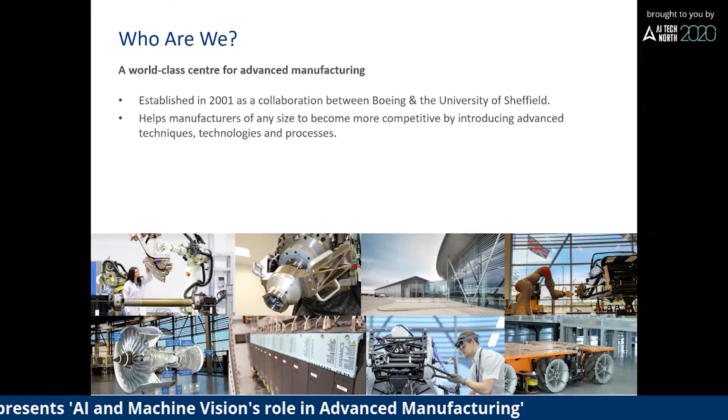Research Centre. We were established in 2001 as a collaboration between Boeing and the University of Sheffield, and that link between industry and academia is something that we keep to this very day. I'll go over a little bit what that really means to us and how that impacts the work that we do.

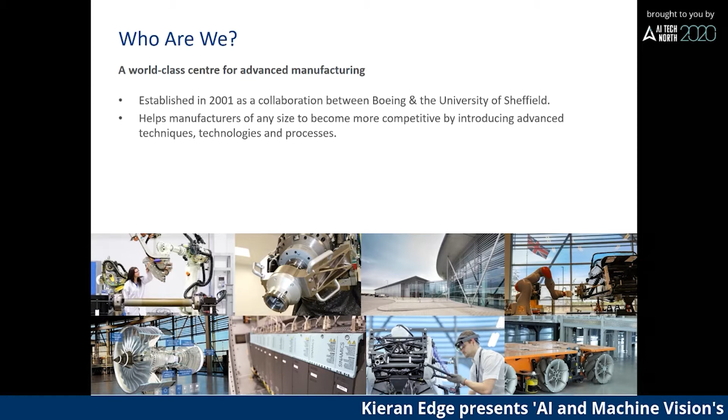Our mission statement is to help manufacturers of any kind and any size within the UK to become more competitive and more profitable by introducing advanced techniques, technologies and processes. So we de-risk it, make sure that it works, and then put it off into industry.

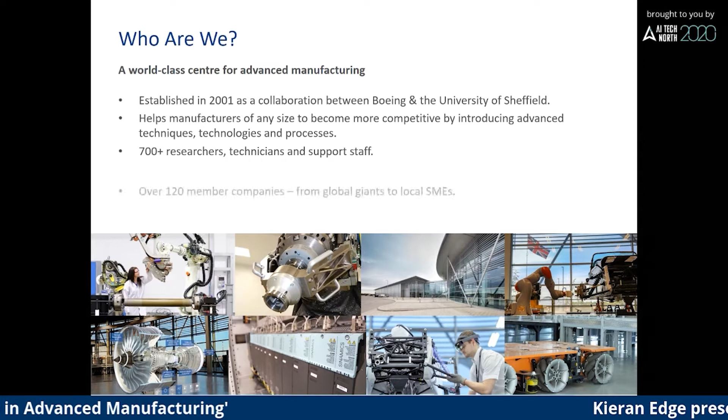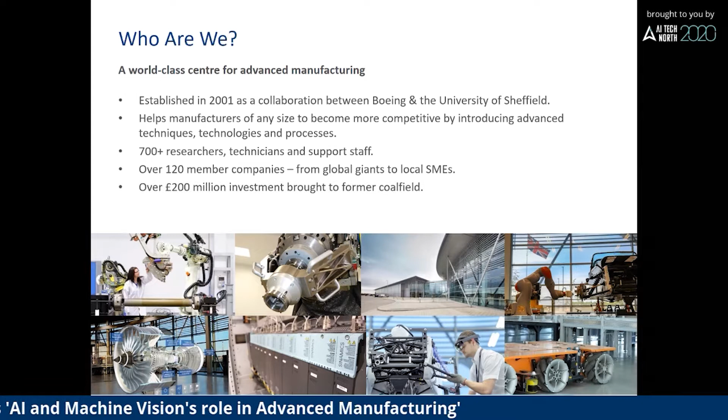We have over 700 researchers, technicians and support staff here, so we have a large capacity for doing a large range of projects, and we have over 120 member companies, from global giants to local SMEs. We brought over £200 million of investment to the former coalfield here in Sheffield, to the Orgreave colliery, and we continue to work with Rolls-Royce and Boeing as part of their global research networks.

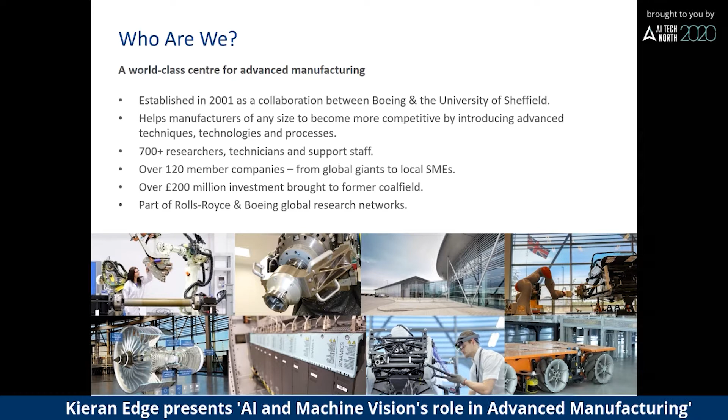So this is sort of the region that we sit in as well. I don't know if you're familiar with the MRL scale, but it's a scale of how mature a technology is, where number one is it's sort of a scientific concept, done in a lab somewhere in a university. And number 9 is it's been in use for ages, we know all the metrics about it, we know what this technology is.

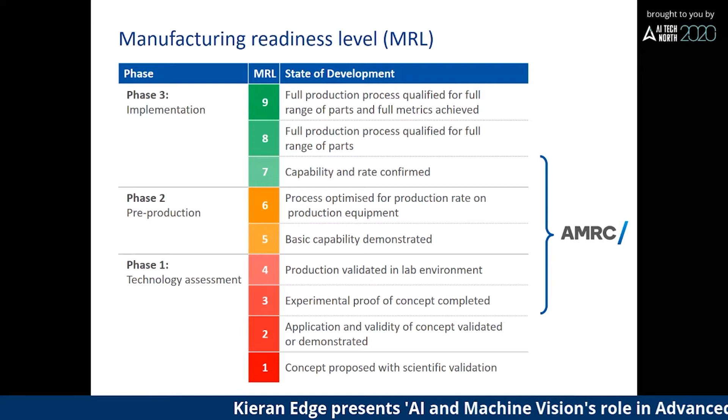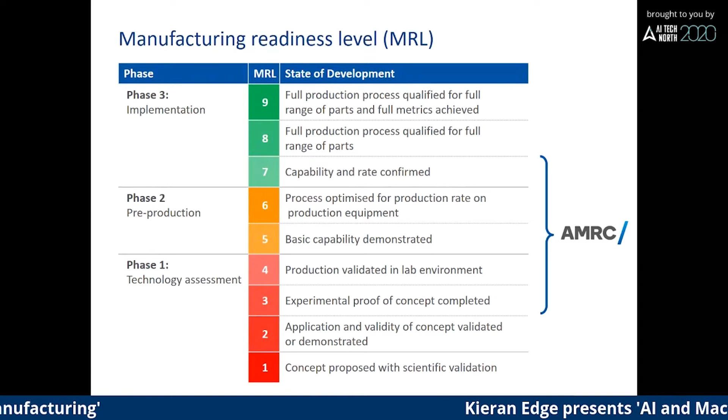And we sit in this gap between 3 and 7. So getting it from production, proof of concept, experimental proof of concept, to the point where it's in pre-production, at which point we hand it over either to an integrator or the actual end user themselves to then run with that technology and work with it. This is the sort of sample process that we undertake, where we take low-level technology from academia, we develop proof of concepts, we make it more mature, and then we hand it over into industry integrators and production.

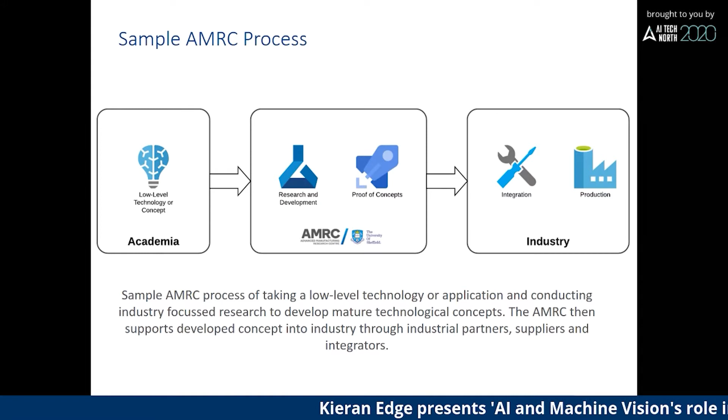Right, so this is the main body of the speech now, after we get the introductory spiel out of the way: the growing need for machine vision in advanced manufacturing.

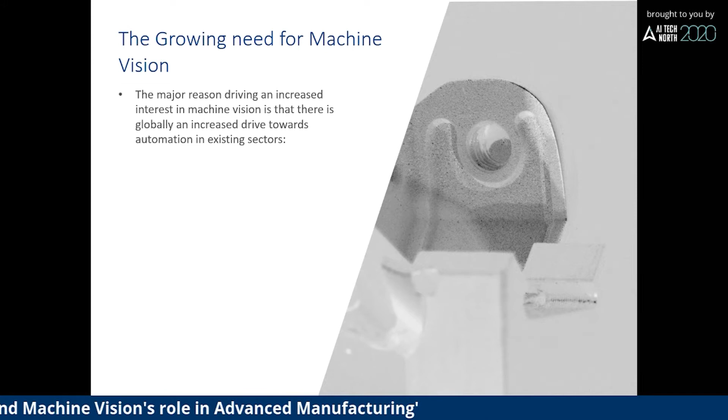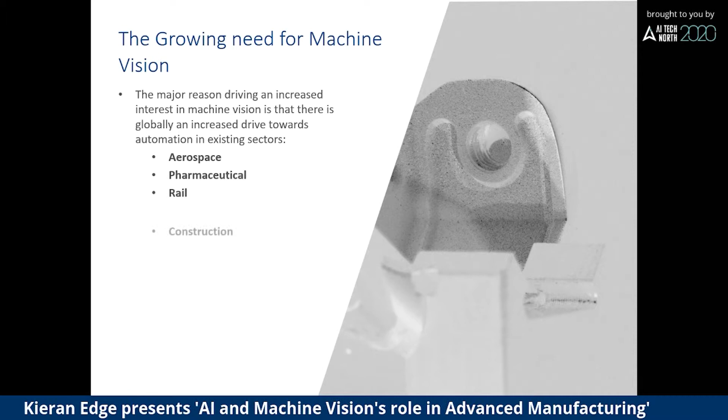We work with all these different companies from all these different industries, but what we see is they seem to have the same needs, same requirements for machine vision and for AI in their industry. The main sectors where we're seeing the largest drives at the moment are aerospace, pharmaceutical, rail and construction. This is where we're seeing the largest increase in interest in this sort of area, machine vision and AI.

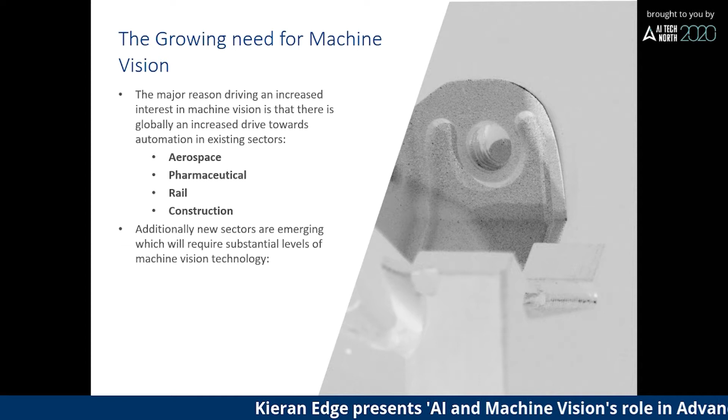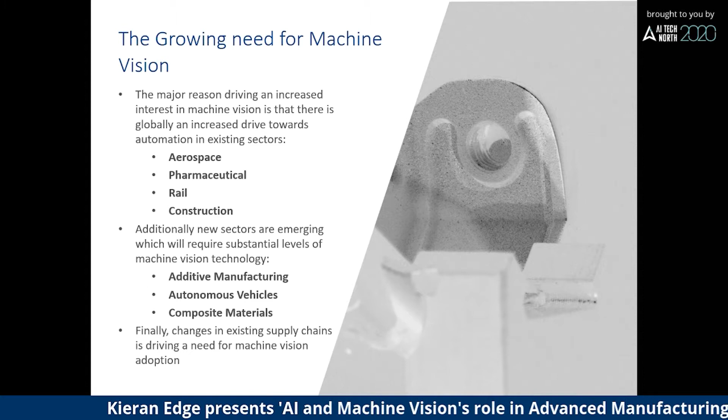Additionally, we're seeing new sectors starting to emerge and become increasingly more interested in this type of work, including additive manufacturing, autonomous vehicles, and composite materials. Finally, the main area where we're seeing growing need for machine vision is in supply chains, and the need to reduce the length of supply chains and increase the overall resilience of supply chains in general.

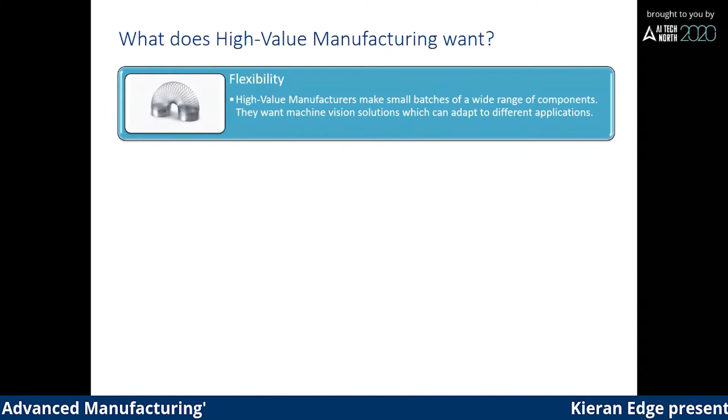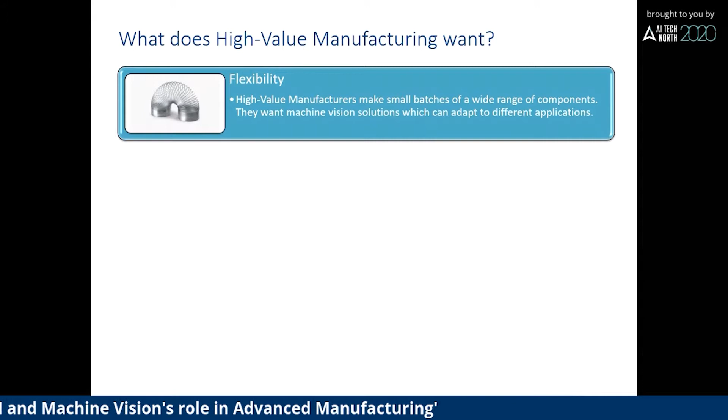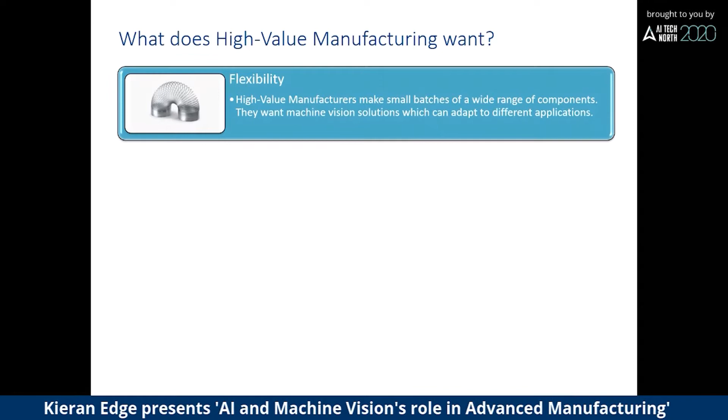So what do these high-value manufacturers want? What do aerospace, pharmaceutical, rail, construction, all these advanced manufacturing firms want from a machine vision system and an AI system? They want flexibility. High-value manufacturers make small batches of a wide range of very valuable components, so they can't have a machine vision system and an AI system tailored for each specific type of component. They need something flexible, something that can do a range of activities, otherwise they don't have enough space to put these technologies into their facilities.

They want systems to be scalable. They want them to be able to scale with their components and with their production.

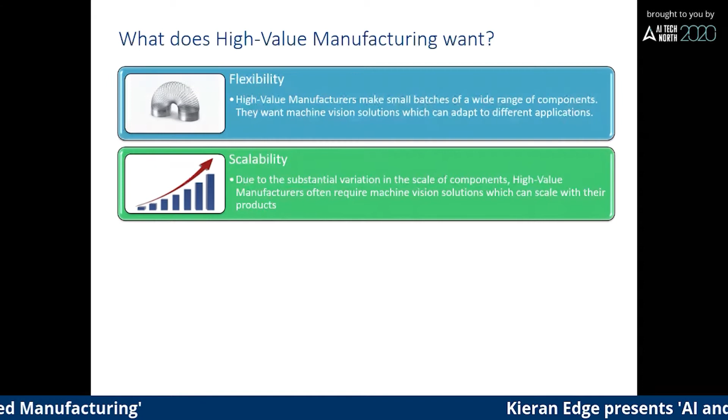They want it to be able to say, I want this that can inspect a turbine blade that's this big, and scale it up so it can also inspect a fan blade, which is 50 times the size of it. They want this technology to be adaptable and scalable.

They want traceability in it. They want to be able to link the decisions that are being made by AI and machine vision systems and be able to actually trace them through the life of the component, so they can say, I know when this decision was made about this component at this time, this is what it's done, and this is what it looks like over its life.

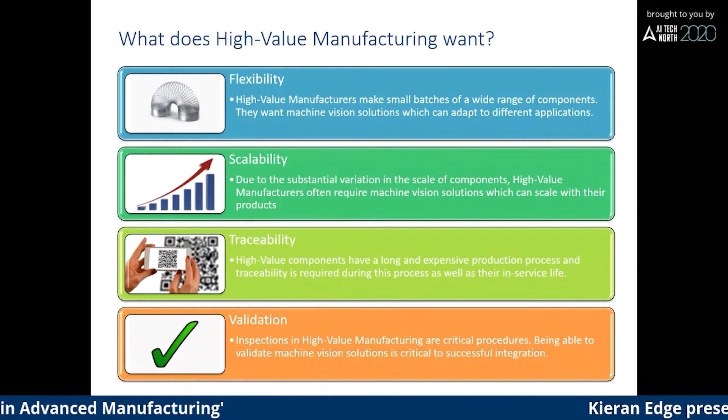Validation. They want to be able to say, this system will work. This system will work because we've proved it out. We tested it to its limits. We know that this will work. An aeroplane won't fall out of the sky because we are absolutely certain that this system will work.

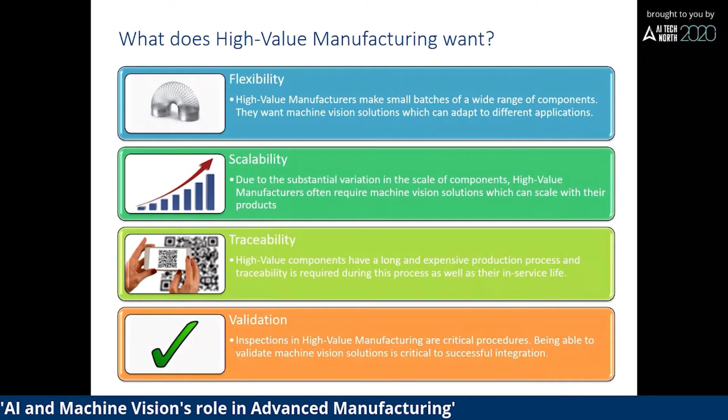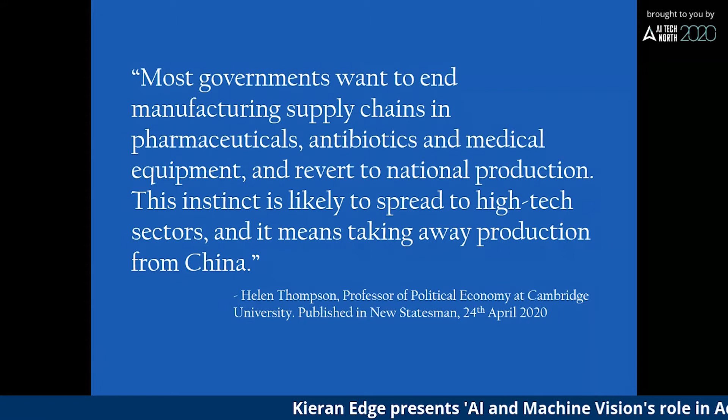Now, moving tack a little bit, we're seeing an increased drive amongst advanced manufacturers to reduce supply chain. This is very poignant at the moment, in that most governments want to end manufacturing supply chains in pharmaceuticals, antibiotics, and medical equipment and revert to national production. This instinct is likely to spread to high-tech sectors, and it means taking away production from China. That's Helen Thompson, Professor of Political Economy at Cambridge University.

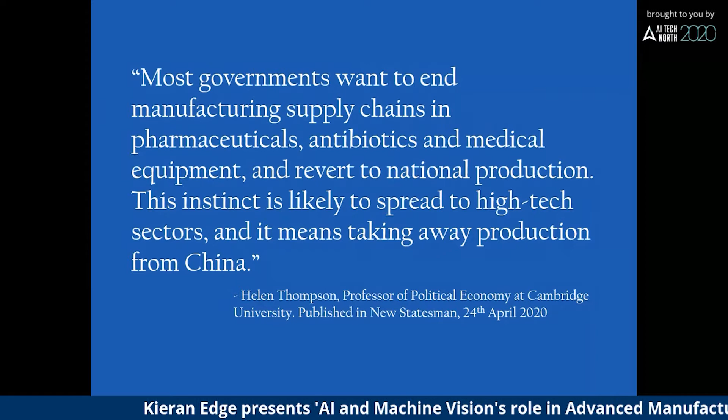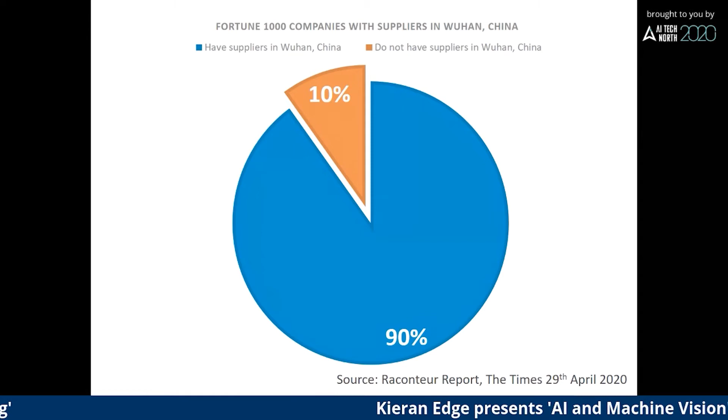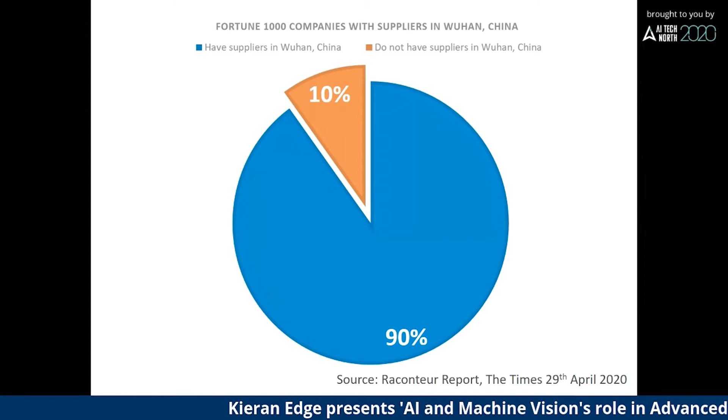And this is very much what we're seeing as well from industry. They want to take supply chains and reduce them. Of the Fortune 1000 companies, 90% had suppliers in their supply chain in Wuhan, China. So when the coronavirus crisis started to hit all the way back in 2019, the supply chains were immediately exposed and left vulnerable. So the impact of coronavirus to UK manufacturing started before coronavirus really started to impact UK society.

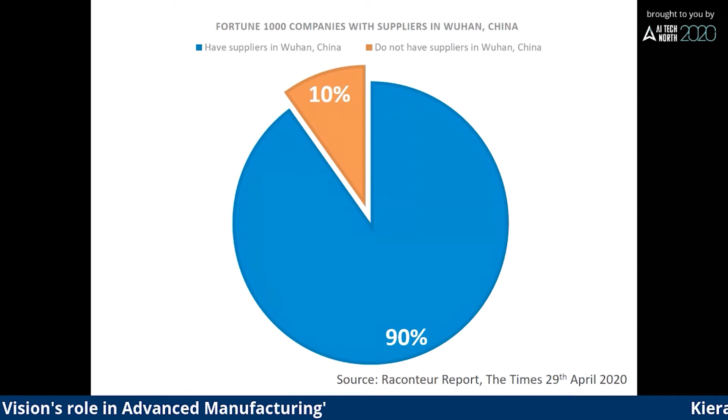Now, because of this, there's this drive to make these supply chains more resilient, make them so that they're not going to suffer such global shocks, so they're not going to take that and really have impacts, because a supply chain, like any chain, is only as strong as its weakest link. So how do we make this better? And that leads us to this.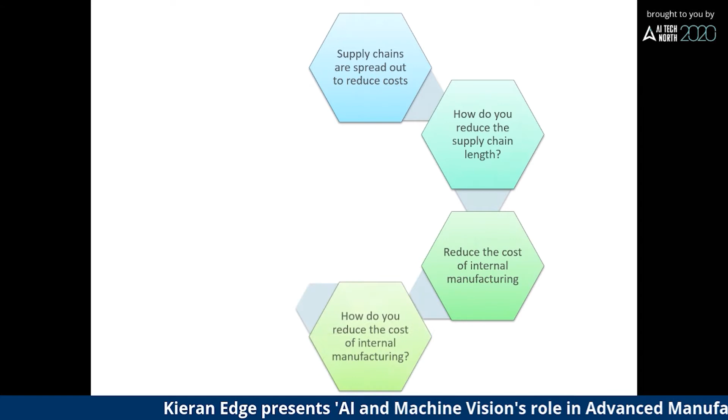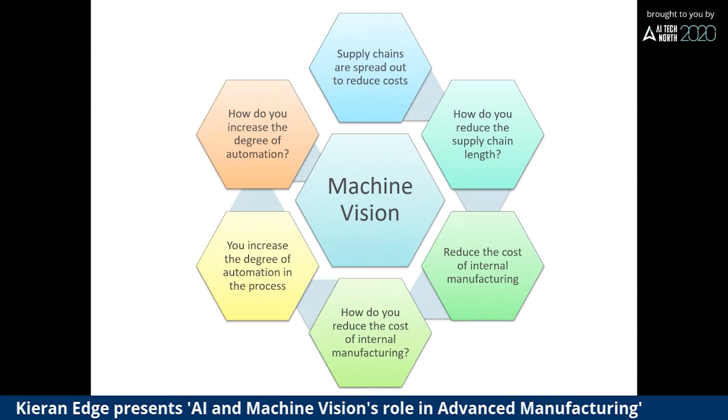How do you reduce the cost of internal manufacturing? Well, you need to increase the amount of automation that you have in the process. How do you do that? Machine vision. So machine vision and artificial intelligence within the machine vision is how you're going to reduce supply chains by increasing automation and making British manufacturing more competitive, more cost effective, more cheap.

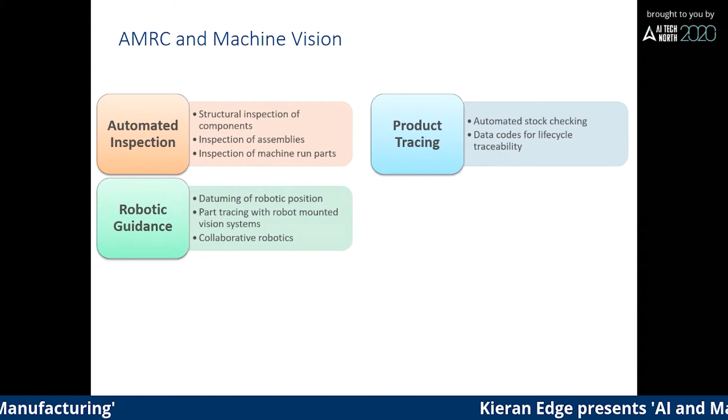Now, how do we operate? We at the AMRC currently conduct areas of research in many areas of machine vision and artificial intelligence. We look at automated inspection, product tracing, robotic guidance, process monitoring, AI for a wide range of activities, and 3D inspection. These are the main areas where we're currently researching machine vision.

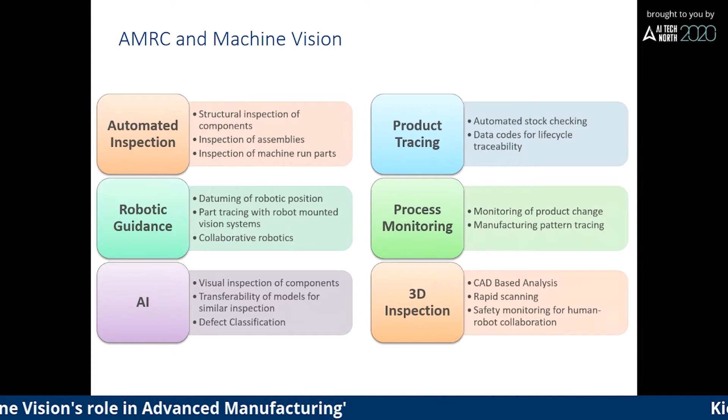So what I want to do now is give you 3 different example applications and different areas of research that we've worked on in a few different sectors. So the first example I'm going to walk you through is talking about a partner-specific application which we've worked on to solve with a large aerospace firm.

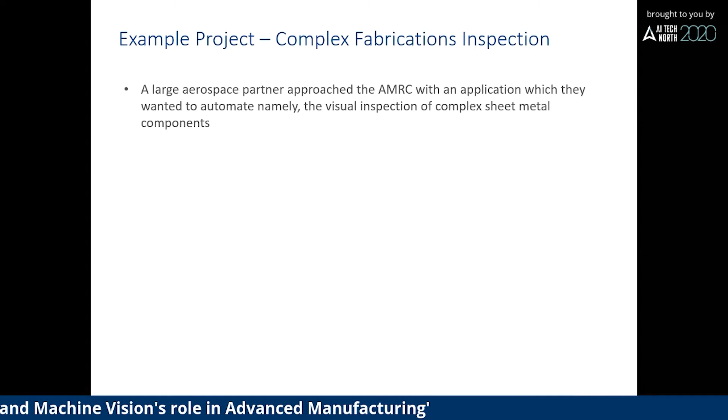Now, a large aerospace partner of the AMRC approached us with an application saying they want to automate the visual inspection of complex sheet metal components. And this application very much highlights what I was showing about what advanced manufacturers actually want from this. There was a wide range of features on these components, and a wide range of components in general that they needed to inspect.

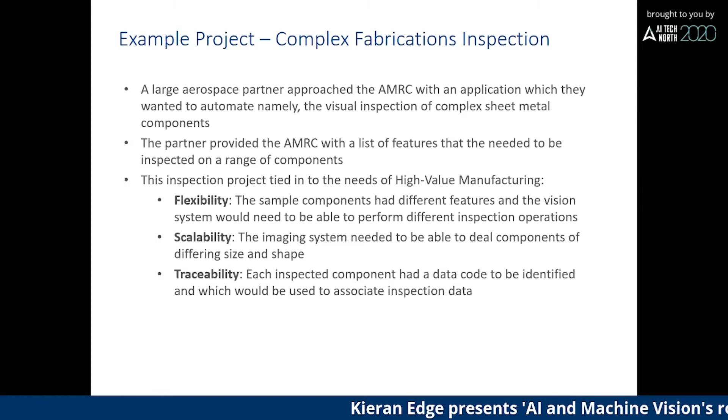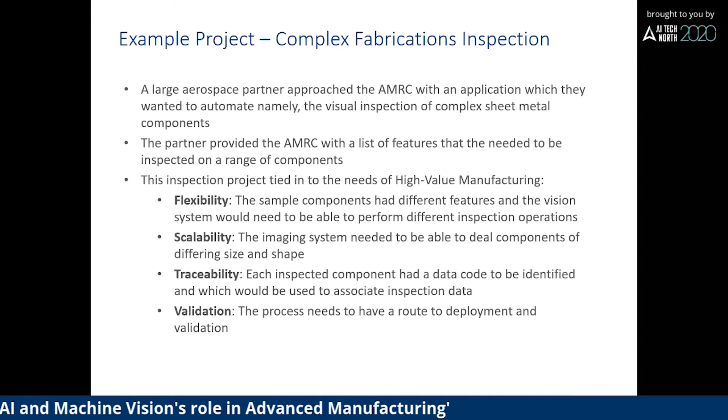So they want to be able to say this system made this decision on this component, and I can trace that right back here, like they do with operators at the moment. They want to validate the process, to show that this new AI system is as good or better than the current human inspection process, which is really key, and surprisingly difficult. It's possibly the hardest part of this entire process.

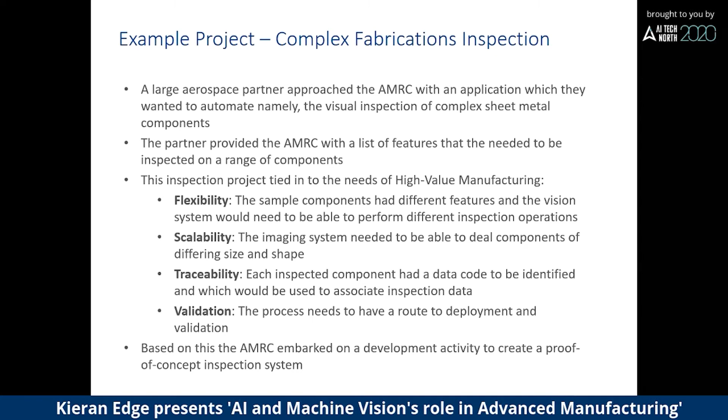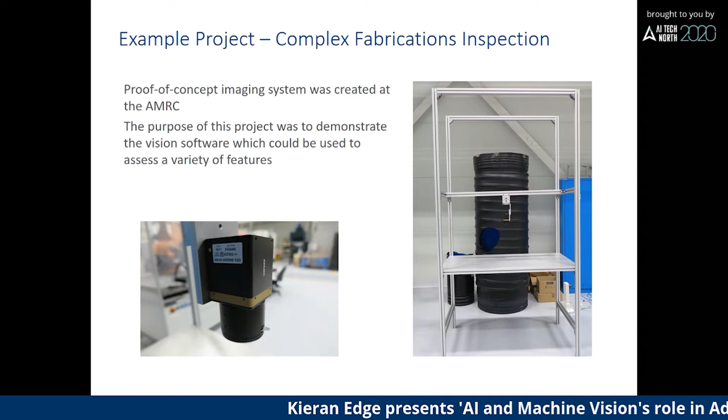So based on the requirements and samples they gave us, the AMRC embarked on a series of development activities to create this proof of concept inspection system. We did it quite rough, quite rugged, considering how advanced the actual components are. We've got the metal frame, set up the camera so we could start acquiring data and making a sample.

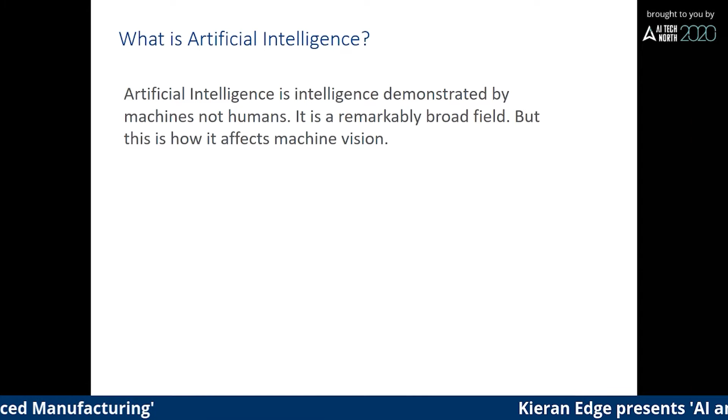Now I think at this point it's important to identify the difference between artificial intelligence and machine vision for these types of activities. There's a couple of approaches in machine vision. The classical approach: the camera takes a picture, we give it data and rules, pass that through a classical machine vision system, and you get results - how many holes, how many edges, the difference, the intensity of light. However, when you're training an AI system to do these activities, you're not giving it data and rules.

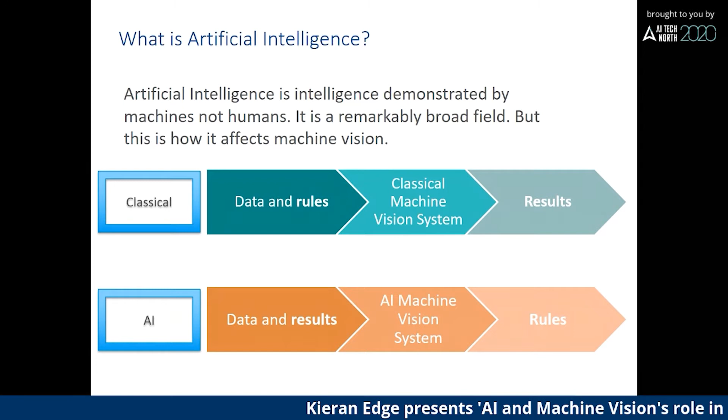You're giving it data and results - saying in this image there is a crack, in this image there is burning, there is melting. And the AI machine vision system then learns the rules and outputs them instead, so you're using that instead of manually processing it. We found you can use both of these methods in tandem to produce a much more competent system than was previously possible, or available just by using them individually.

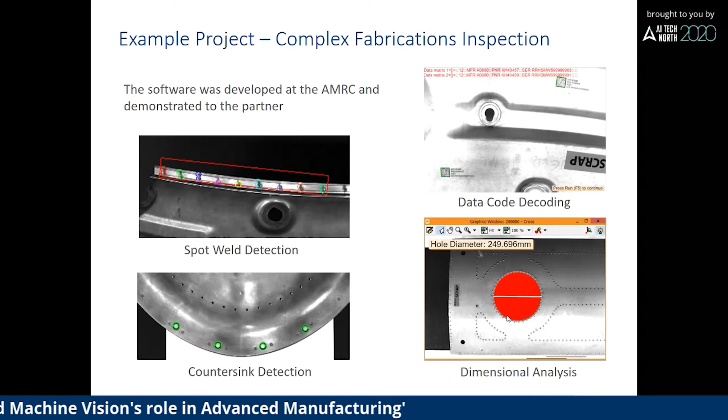So we attacked a lot of different applications here - using AI to identify spot welds on the surface, using AI to identify countersinks and their location, and using classical machine vision to decode data codes and perform dimensional analysis. In this sense, we got AI and classical image processing techniques to interact with each other and complement each other's strengths and weaknesses.

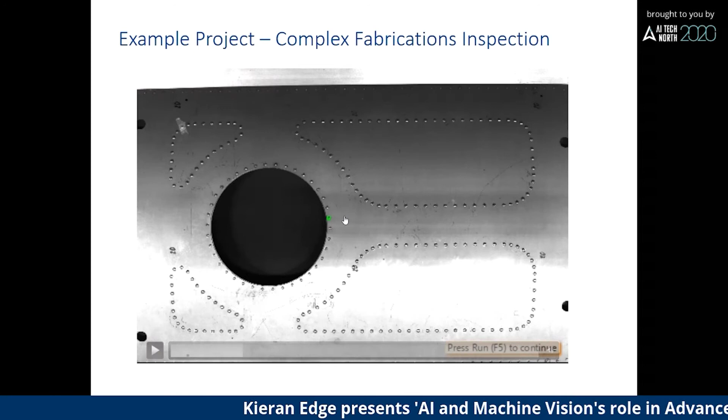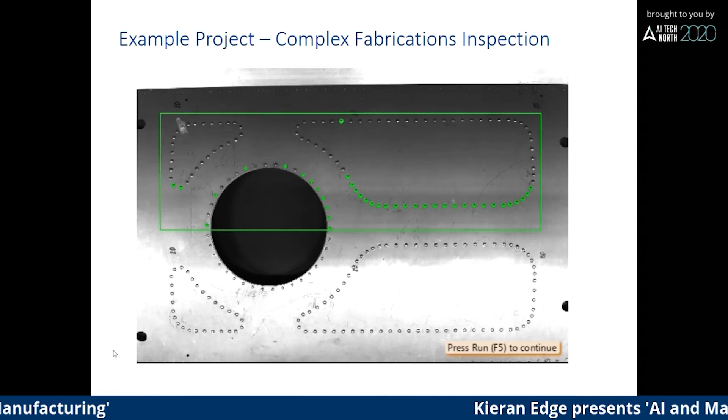This is an example of using the system to identify rivets on a component in real time, counting them and giving their location. We load the component in, say this is the component we're looking at, and we want to identify these rivets all around its surface. It starts on the first one and finds every single rivet in the image, counting them up - 113 rivets identified.

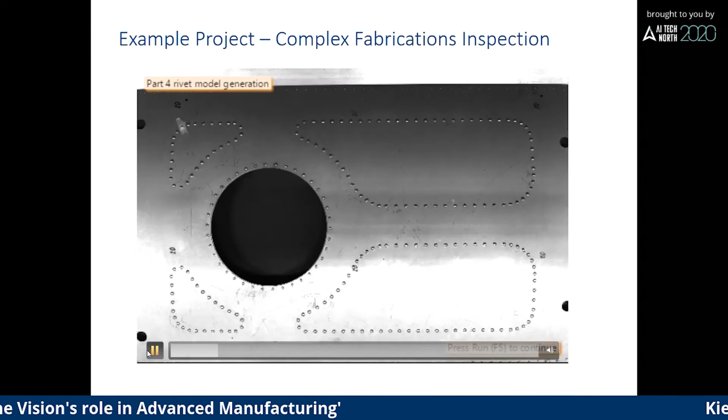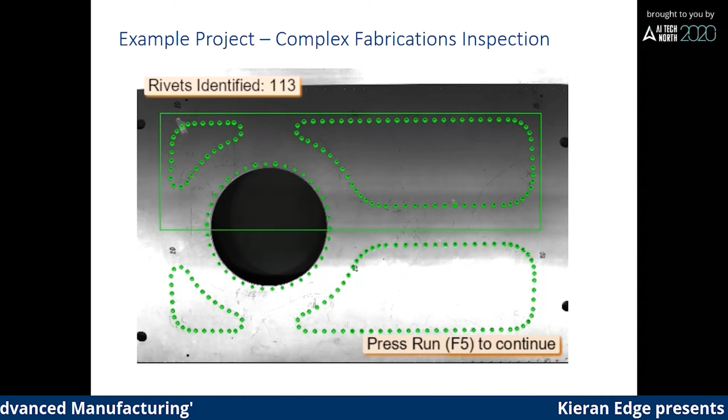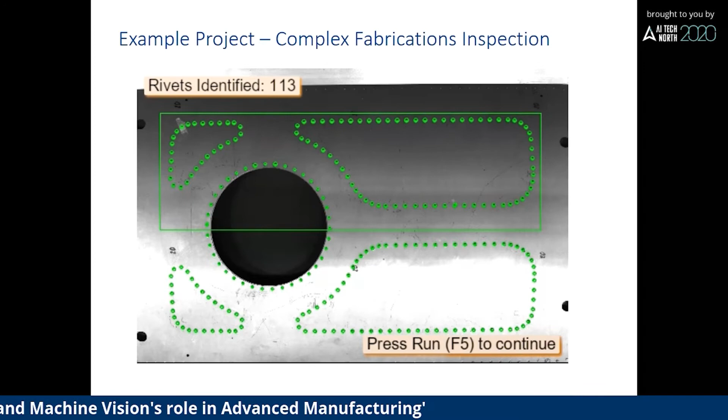Much faster, much more accurate than a human. You can see it actually processing in real time, identifying them as quickly as it can. This is a very fast system for identifying these rivets, and it's scalable and flexible because it knows what rivets are - it doesn't know what this component is, it knows what rivets are and how to find them. In the same way, if you told a human to go find all the rivets in that thing, it doesn't matter what that thing is, it knows what it's looking for. And that's how this system operates.

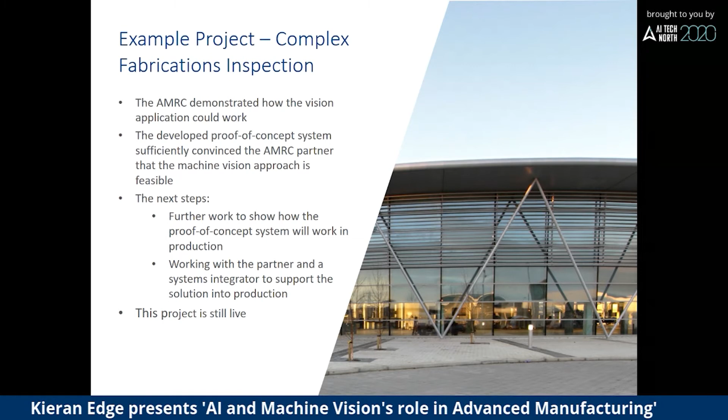So we're still working on this, it's still live, and we're looking at putting this into production now. We're looking to work with partners and systems integrators to support this solution into production. So if anybody wants to get in touch after us to talk about this type of project or activity, please feel free to do so.

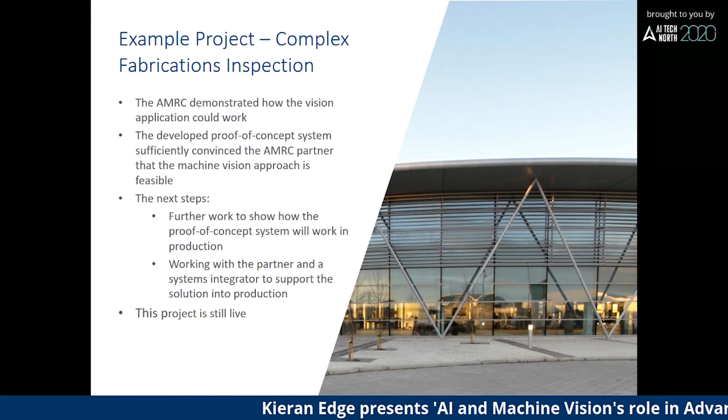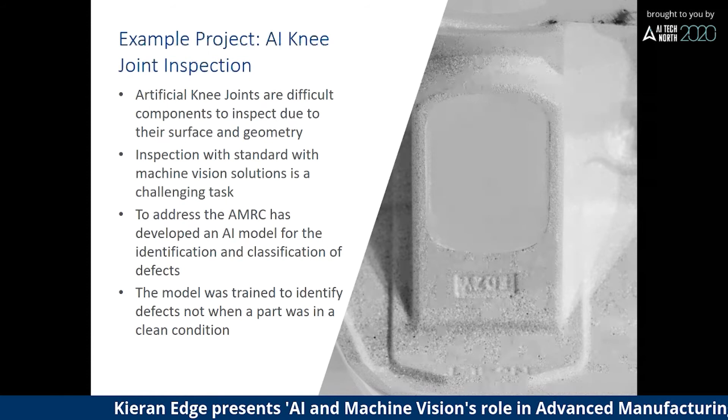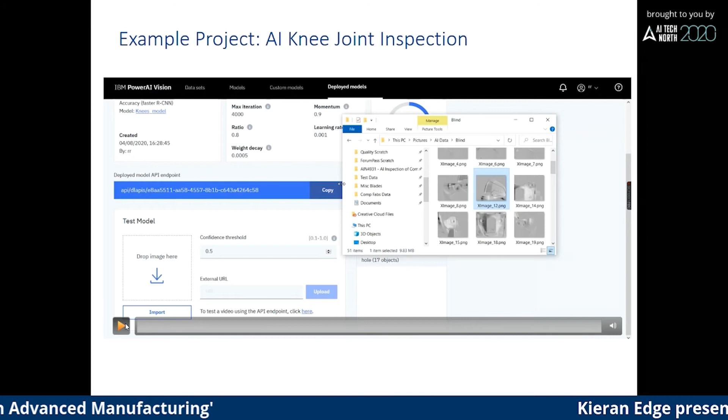We've done a lot of work with IBM to get AI solutions actually on shop floors. This is one example, bringing in the knee image, quickly processing it, identifying a scratch, identifying two holes, and classifying them. This is a model which we have trained, and it's working in real time.

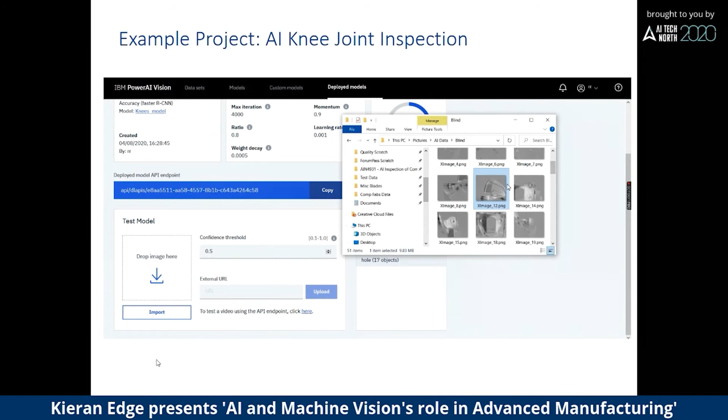We've trained it based on examples of defects, not examples of knee joints. It doesn't know what knee joints are, really. It knows what scratches are, it knows what holes are, and that's what it's looking for. It doesn't matter on the shape or the size of the knee joint. It matters whether it has scratches or holes.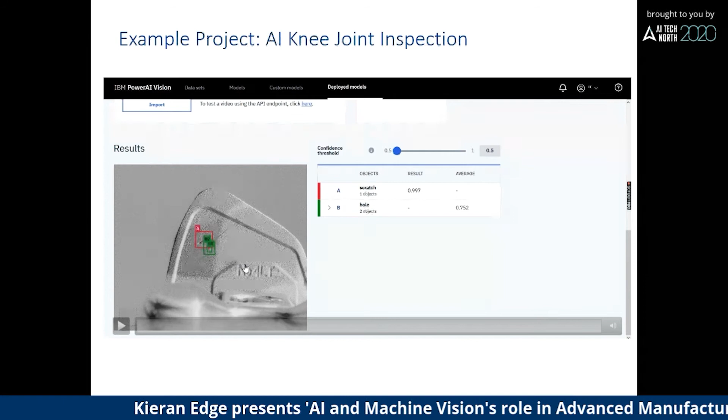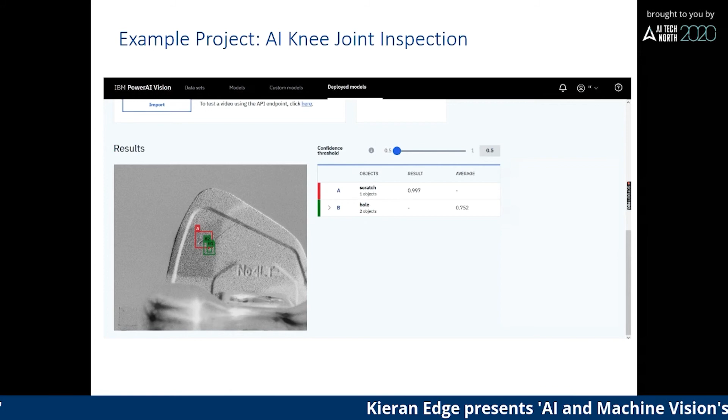So this is something we're currently trying to do, to automate these sensitive inspections in the medical industry, and this is what's needed for this type of inspection. To perform this activity using classical machine vision is far too difficult, almost impossible. We know that, we've tried it. It's too hard to actually do and make adaptable. You need artificial intelligence to do that.

We're also doing low-level research into new technologies. So this is an example of a new type of imaging called polarization imaging, where we're not capturing the intensity of light so much as we're capturing the actual orientation of light.

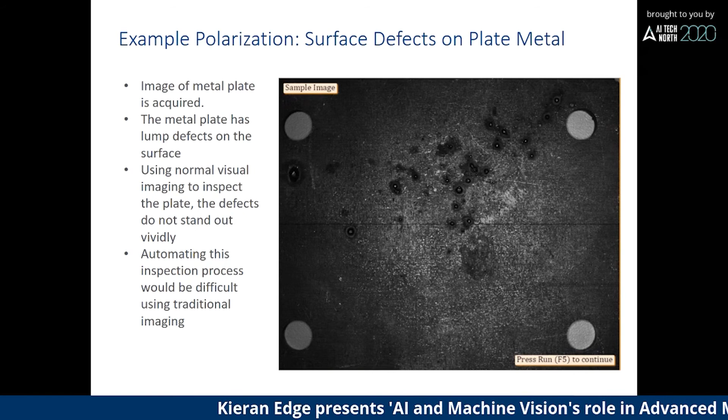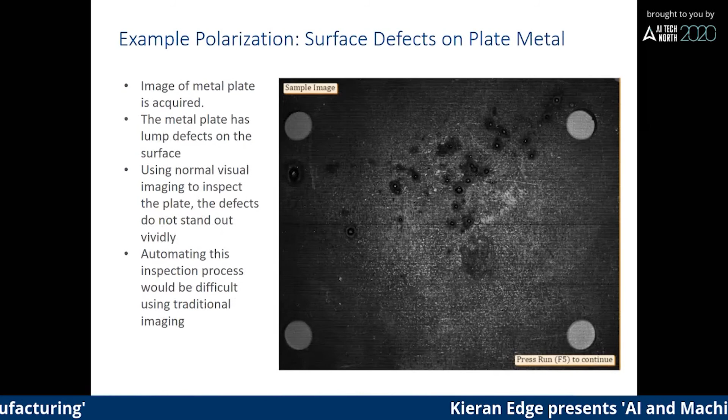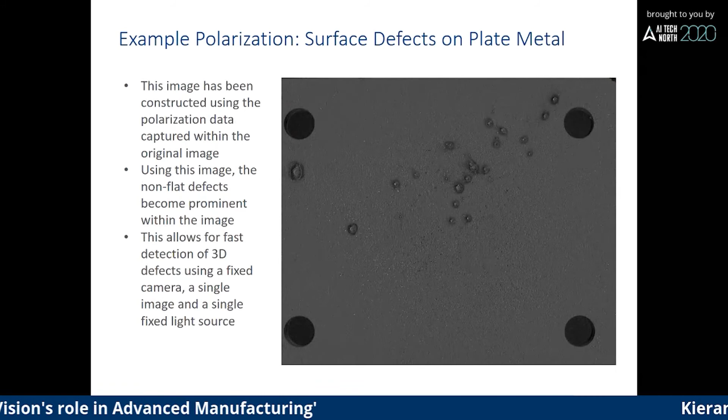So we take this metal surface, for instance, which has weld defects on it, these little weld blobs. We image it, and by taking the actual direction of light, you can see how clearly defects start to stand out, because the surface light coming off the flat background isn't very rotated, but when it's coming off these blobs, it's quite rotated, and we can now pick that out and discern that.

So when we then apply this through our AI system looking for these defects, it can highlight them very, very easily, giving that back to the original image and highlighting it to an operator. So this is a very fast industrial inspection. Yeah, we're working on this type of technology.

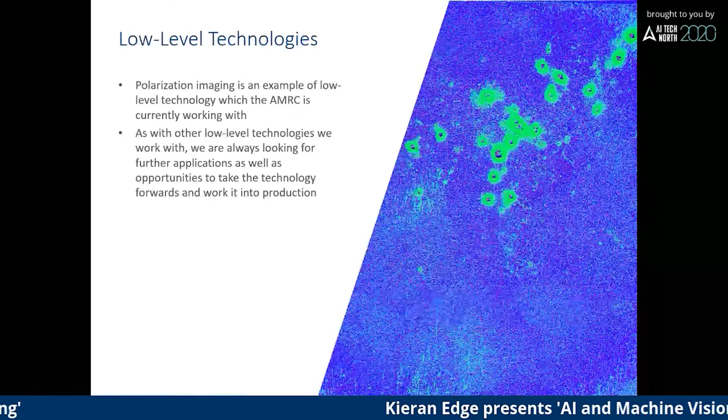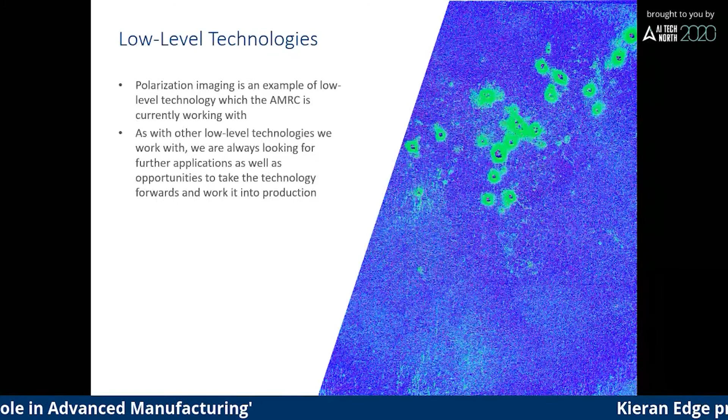We're working on all sorts of different low-level technologies, and we're always looking for further applications of them, as well as new low-level technologies themselves to take forward into production. So if anybody has low-level technology or new processes they want to prove out or demonstrate, this is an area where the AMRC is always looking to work, and we're always willing to work with partners to demonstrate new technologies.

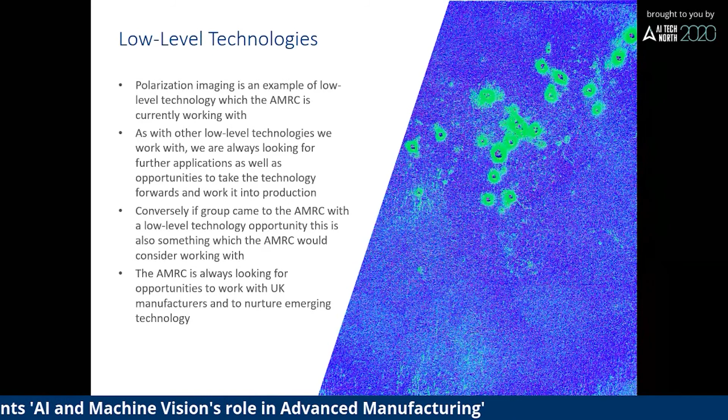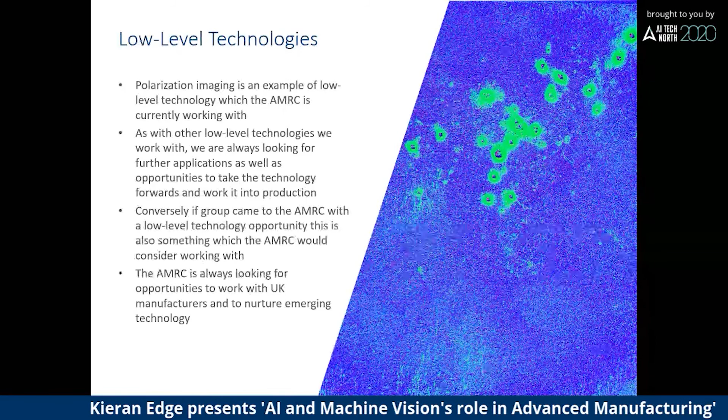We're always looking to nurture new working opportunities with UK-based manufacturers. If that's by demonstrating your technologies to all the different manufacturers we work with, like Rolls-Royce, BAE, Boeing and Airbus, then that's something we want to do, we want to collaborate with. Now, that's what we do. We bring advanced manufacturing techniques to all industries.

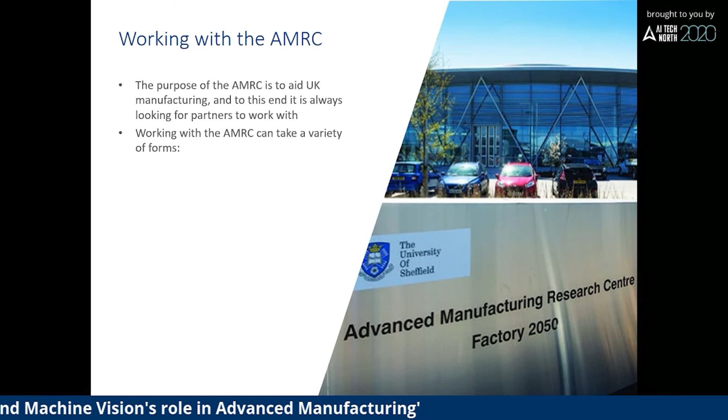We're here to aid UK manufacturing. To this end, we're always looking for people to work with. So if you have any sort of applications in this field, please get in touch. We are not for profit. We don't actually sell anything ourselves because we're a faculty of the University of Sheffield. We're here to facilitate engineering, not to profit from it. We're here just to help nourish UK-based manufacturing.

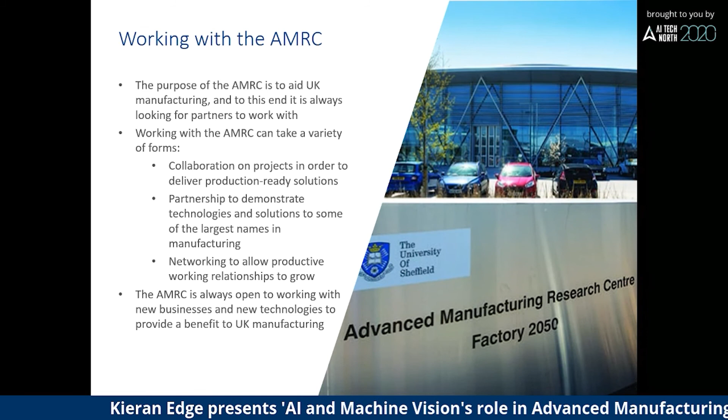Now, working with the AMRC can take a variety of forms: collaboration on projects to deliver production-ready solutions, partnerships to demonstrate technologies and solutions to some of the largest names in manufacturing, and networking to allow productive working relationships to grow by connecting people from different industries and suppliers of different technologies to new industries. We're always open to working with new businesses, and always looking for new technologies to benefit UK manufacturing. So that's the end of it.